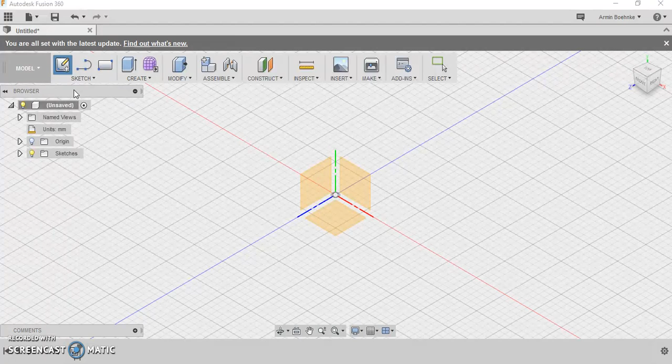Figure out which plane you want to start on. That's the flat plane. If you were sitting down on a desk looking at that plane, that would be that plane there. You can start to see scale. Scale is a really tricky thing when there's nothing here or you don't set any actual measurements. It's hard to know in this space how big you're drawing stuff. So make sure that you set measurements to some of your first drawings.

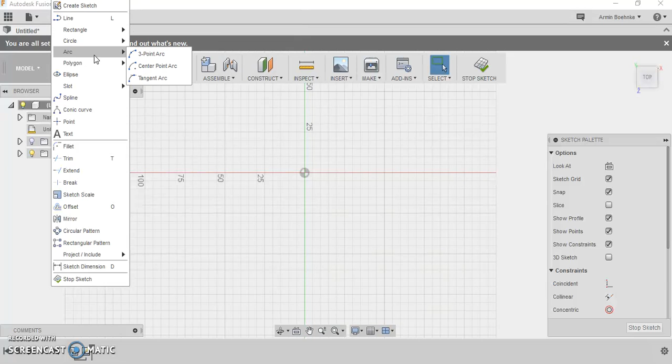We're going to start with a simple sketch. So there's some simple sketch tools that are here. Rectangle, 2-point rectangle. Make sure you always start from the origin or the 0 point. So if you click there, you can drag out what you're after.

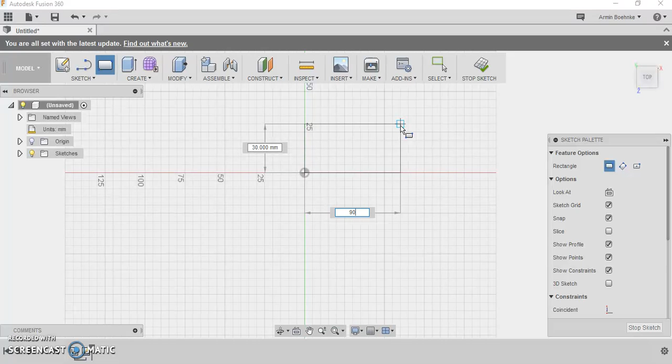Now the measurements for this tag, you can see it highlighted on the left-hand side. At the moment it's set to 30. We actually want 30. So we'll press tab, it'll go to the next one, and we want the length to be 90. Press enter, and there's your square.

Using the wheel on your mouse, you can zoom in and out. If you press the wheel, you can pan just to get it in the right spot in your view.

A couple things that we're looking at, we want to add a circle for the hole to go into for the tag, and we want that to be 5 mil. So again, type in exact measurements, press enter.

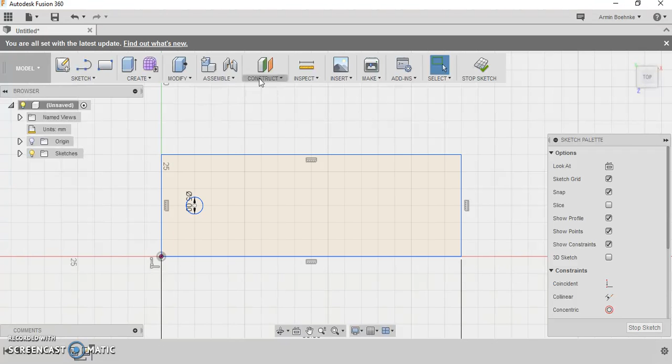We're then going to add some text. Under sketch, you've got text here. Starting in the bottom left-hand corner of the text, type in Flynn. You can see what sort of size it is at the moment, and you just want to change that height measurement. So I've got it set to 18.

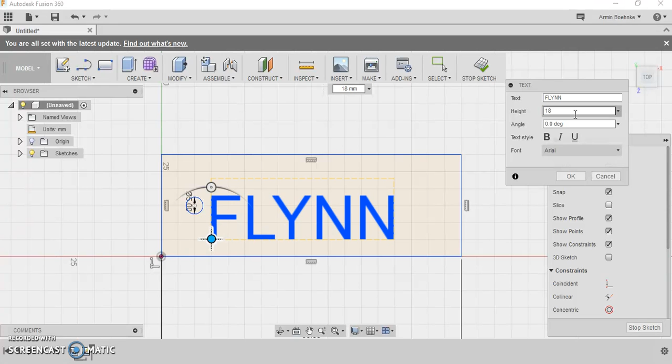You can set it to bold or italic, and the font we're going to use is Calibri. And we'll take italics off. Press OK.

That's not quite as big as I wanted it. You can also change it just by clicking into it.

If you go to the sketch side here, it breaks down what's happened to these two. And if I want to go into just the Flynn, it'll open up just that. In this case we just want to change that height to get something that works for the size we want.

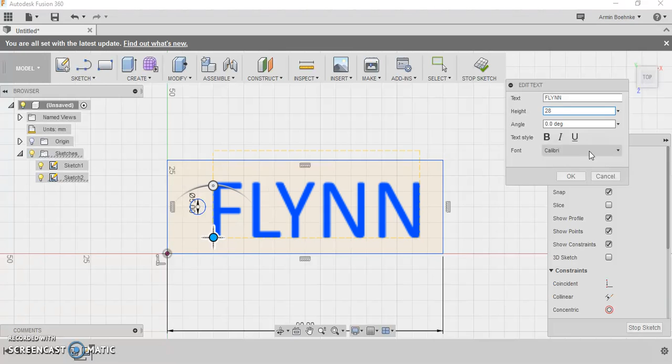Let's go with that. Press OK. We've got our basic style.

If you use the view cube here, you can see what it looks like at different views at the moment. A home view will take you back to that view, and again you can zoom in and out. If that's got all the information you need, once that first sketch is done, just press stop sketch.

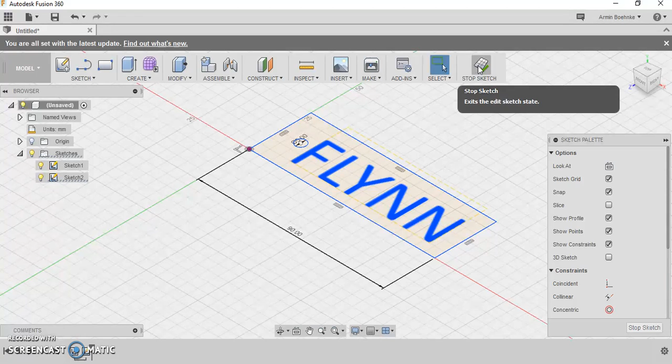Get used to just getting into the view you want using that top view cube. And now we're ready to actually create a 3-dimensional object. So we want to extrude. Have a look for the shortcuts as well. So the extrude shortcut is E.

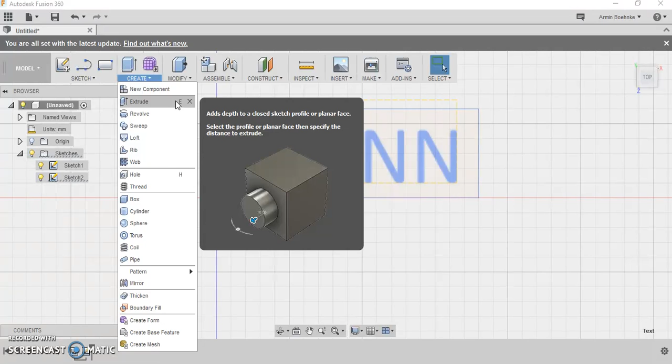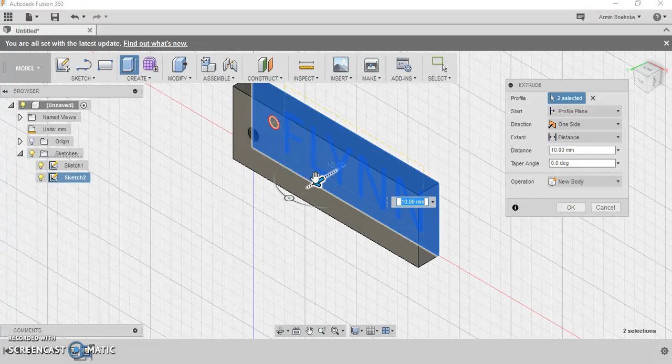You want to pick the shape that you've got. It sees that the hole is in there, so it didn't select that. Then it also gives a direction, so you can come forwards or backwards. We're going to come forwards a specified amount, and the thickness of that is going to be 4 mil. Press enter. So now we've got our actual key tag.

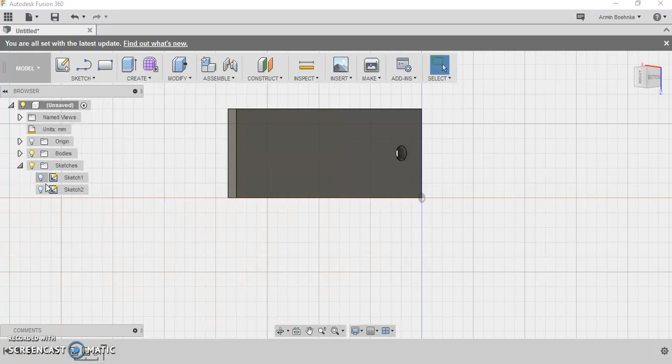We want to go behind it. If you go down here, remember I showed you being able to expand sketches and see the bits that make up the sketch? You can turn them on and off with the light bulb. I'm after the lettering. What I want to do under extrude is select the lettering.

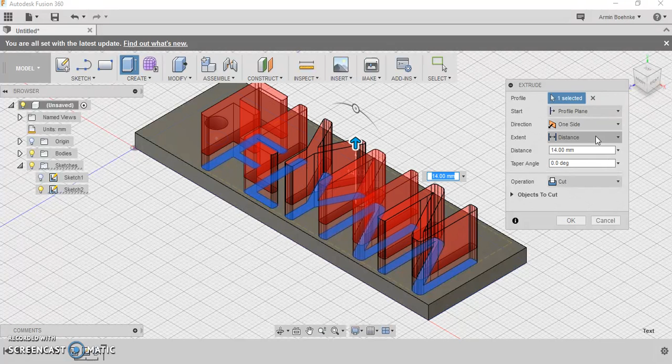If I bring it back to my home view, you can see I could type in there that it's exactly 4 mil that I want to go up. The other thing you can look at is in here you've got the extent. So you can go distance, to object, or all. So we know that all is actually 4 mil.

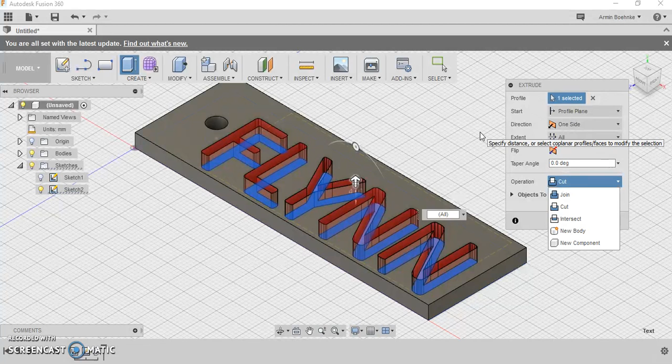Either way would work. Down here, the operation as well. So join, cut, intersect, and you can just play around with those to see how they work and what they do given your design. Because you might find that instead of cutting, you want to join or you want to intersect. So just keep trying with this and keep doing new things. Press OK. And now we've got our key tag with those bits.

So if we undo that, it's a bit easier to see. The last thing we want to do is just add some curves to these edges. You could have done that in this drawing, within that rectangle, curving the edges. But the other place you can do it is within the 3D model or the create and modify.

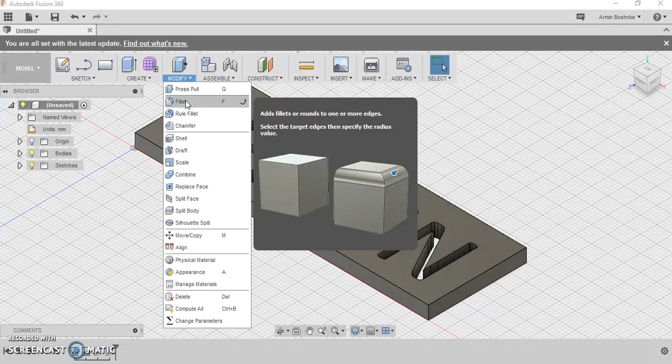So we're going to come here and put what's called a fillet. We'll select all the edges, spin it around to get that fourth one, come back to your home view, and then the radius of that will be a 5 mil radius.

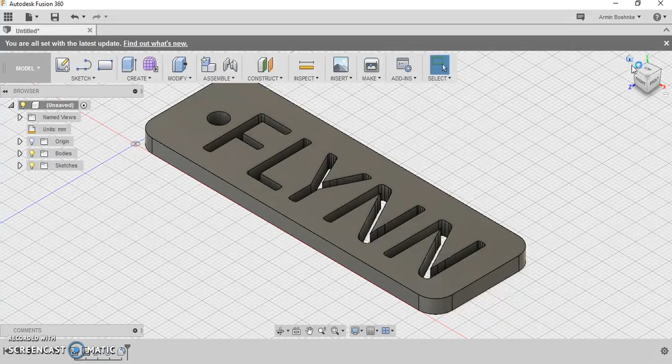And you can see then that you've got your finished product. Zoom in and out using that wheel. If you want to, remember, you press to pan. If you want just the top view, there you go.

All right, so we've got our Flynn tag to be able to now save that and create our working drawing from that. Make sure that you save it to your file, and thanks.

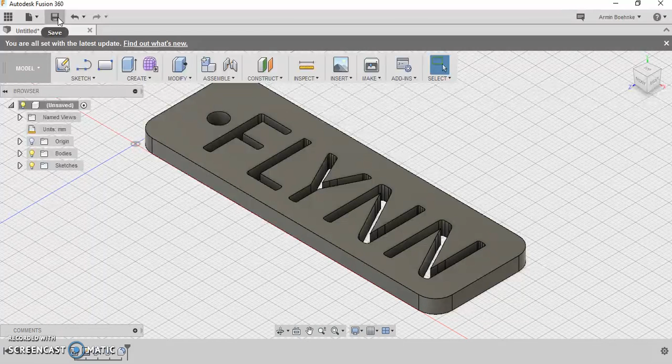It was good fun. Hopefully, ultimately, you just want to trial and error, and it's about having your idea, and there's generally a few ways to get it done. But yeah, just don't get frustrated, be patient and stay with it.